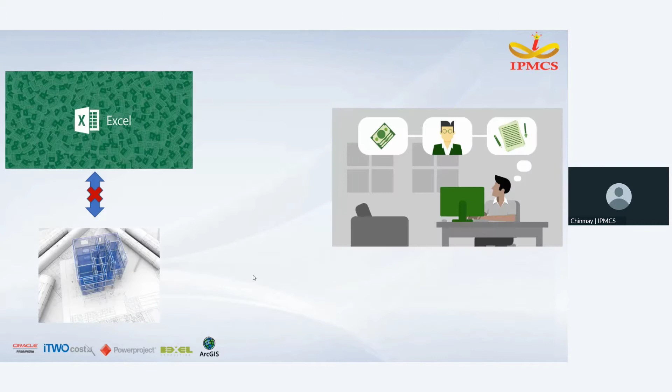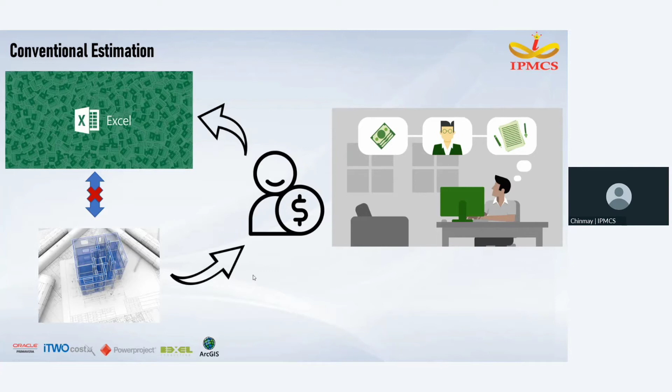But if I say most of these things, you can do at one place, isn't it interesting? But before moving to that, we will see our conventional method, that is using Excel - partially accurate but time consuming and with a lot of challenges. Challenges in Excel? Yes, there are. The challenges are: difficult to manage advanced pricing rules, lack of control and security, human error is more, it is not designed for collaborative work, plus it is hard to consolidate. Is it relatable, right?

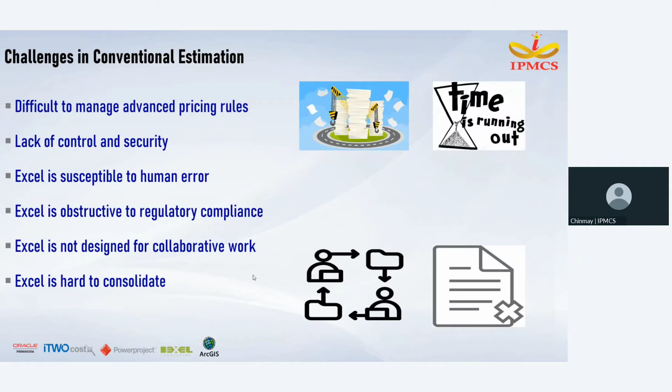What if I say that we need to remove our conventional method and move to digital estimation? Now you will ask, what is digital estimation and how it works? Basically, digital estimation is the estimation of takeoffs through software which produces accurate estimations compared to doing it by hand, with great accuracy, which in today's case is iTWO CostX.

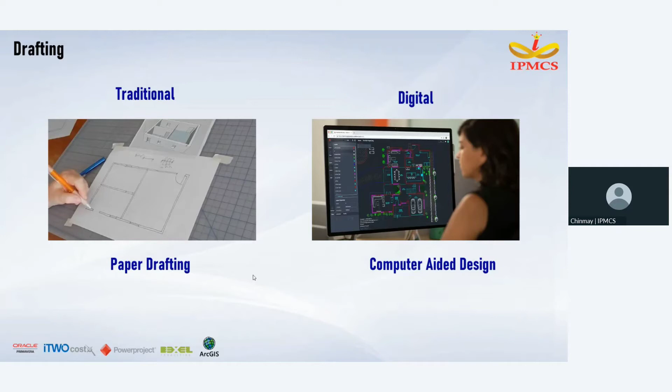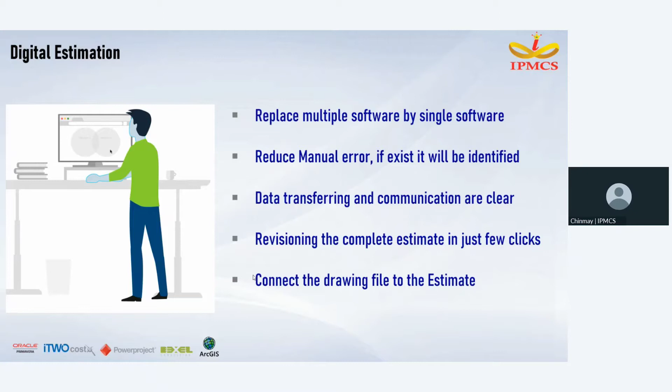In drafting, we can use CAD designs instead of paper drafting. For modeling, we can use BIM software to work efficiently, which has benefits such as replacing multiple softwares with a single software, reducing manual error, easy data transferring and communication, and revisioning of complete estimates, and many more. All this with the advantage of cumulative work, which is time saving and cost saving.

By cumulative work, I mean that everyone can work on this software. Before, when there was a communication barrier or hierarchical barrier, it is removed in digital estimation. All of this is possible because of iTWO CostX.

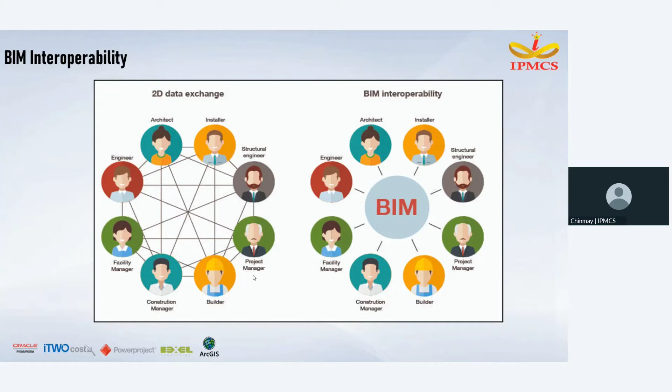Before moving to the software, now we have a poll for you. I will give you a question, and you have to answer it in 15 to 20 seconds in the chat box. Your question is, which of the following items is difficult to quantify in an industrial project? Your options are masonry, steel structures, MEP and HVAC, or any other quantities. You can now answer it.

So if you see, most of you have answered steel structures, right? So that can be easily done in iTWO CostX.

So now, what is RIB iTWO CostX? It is your complete 2D and 3D estimation solution, which has been awarded in 2019, 2020, and 2021 for estimation and valuation software of the year. It is widely used to improve accuracy and efficiency in quantity surveying, construction, subcontract comparison, estimating projects for large and small scale. It is the leading estimation software used all over the globe.

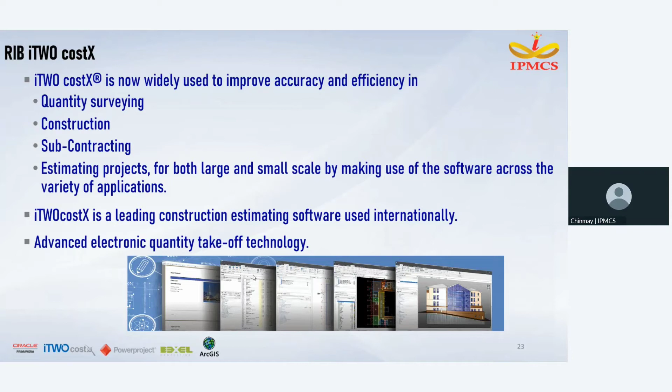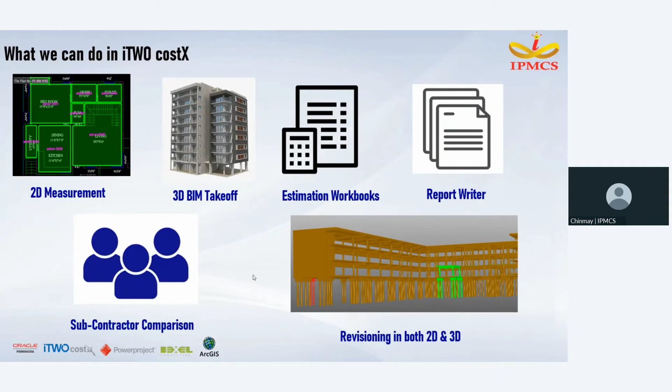With RIB iTWO CostX, we can do 2D measurements, 3D BIM takeoff, estimation workbook, report writer, sub-contractor comparison, revisioning in both 2D and 3D, and many more things.

So if we see key features of iTWO CostX with respect to drawings, they are scale correction, drawing register report, working area setup, save view. In 2D quantification, we can do layer customization, rebar mode, overlap, adding colors, viewing in 3D, and quantification report.

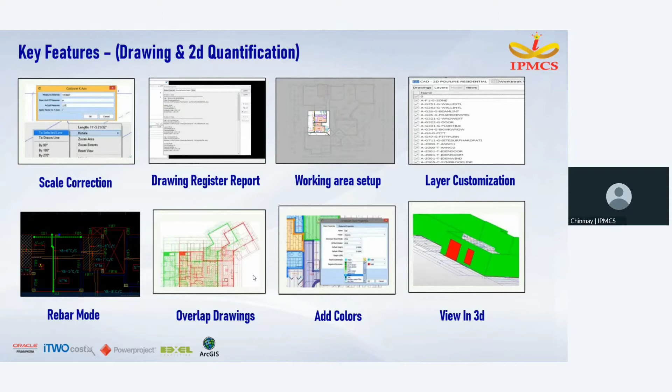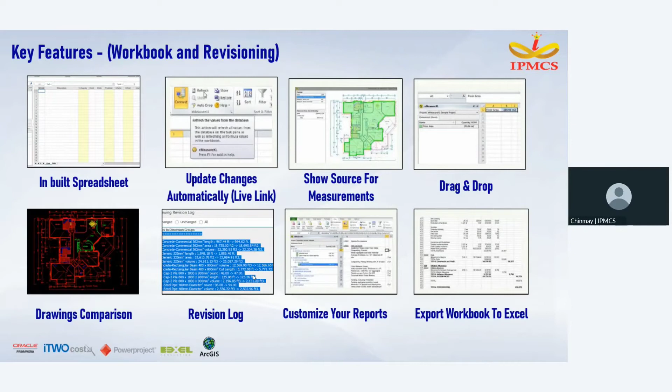For the workbook, we have in built spreadsheet, live link, show source, zone wise filter, reference report, code wise grouping. In revisioning, we have drawings comparison, revision log, and comparison report. We can also create report templates and login credentials which will restrict your project files.

So if we see the compatibility of iTWO CostX, you can import IFC files, PNG files, JPG, DWF, PDF, SketchUp, DXF, DWG, RVT, Revit files, and you can export it in PDF, RTF, Excel, HTML, image, and Primavera as well. Now we will see our next poll.

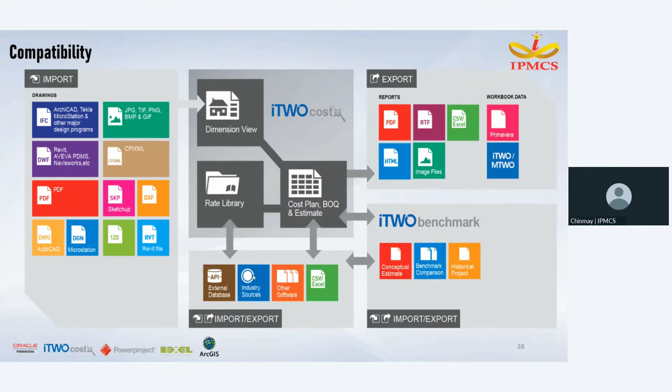Your question for the poll is, what difficulties do you face to recalculate the renovation of a PEB structure? Your options are comparing time consumption, loss of old records, comparing existing building drawings, or comparing changes in existing drawings. You have 15 seconds to answer it.

Thank you so much for answering. So most of you have voted for comparing changes in existing drawings. So all these things we can do in iTWO CostX, and for the same we will see in our next topic.

So moving on to our next topic, estimating of renovated industrial building. What is industrial building renovation? It involves updating and remodeling of a building that houses industrial businesses. These structures are typically industrial plants, factories, or warehouses.

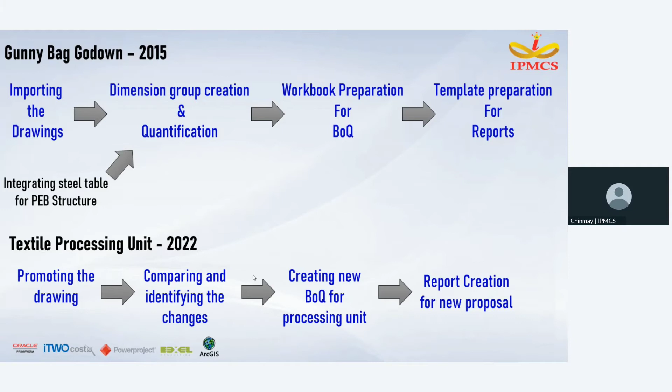All this for a gunny bag godown which was created in 2015. But in 2022, we converted it as a textile processing unit, in which we just promoted the drawing, compared and identified the changes, created new BOQs for the processing unit, and created a report for the new changes. Now, more about this, Mr. Dhanashekar will guide you. Over to you, sir.

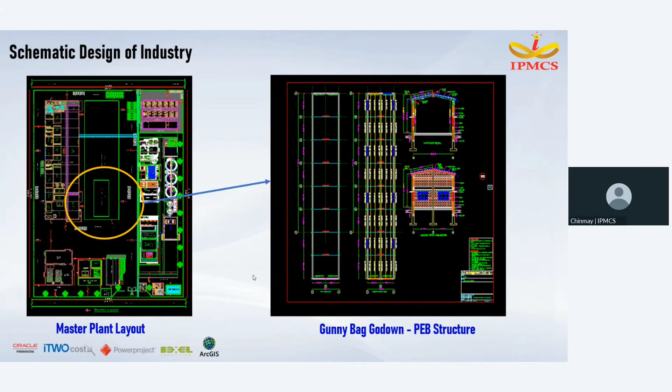Okay, moving on to the software part. I'll just share the software to you. Just tell if the screen is visible or not. Is it? Yes, Mr. Chinmay, it's visible. Okay, you can proceed.

From here, what we'll do is we'll add drawings. Okay, so now...

For the software part, I think Mr. Dhanashekar will tell you more about it. Just I'm transferring to Mr. Dhanashekar.

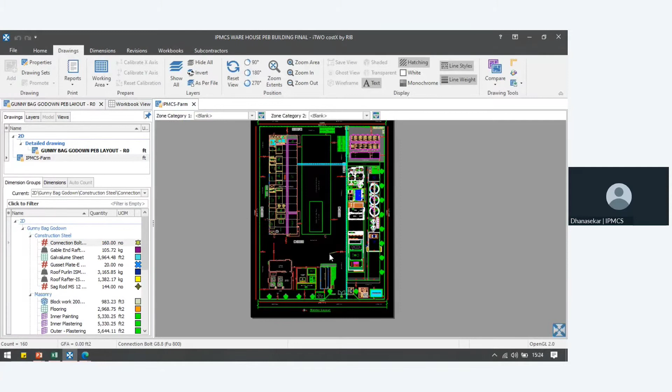Thank you, Mr. Chinmay, sorry for the confusion. Let me move to the CostX part. Here I imported two different drawings. This is the master layout which we can see. On this master layout of the complete industry, I took this particular building, the Gunny Bag Godown, for the detailed quantification. So here I have my drawing.

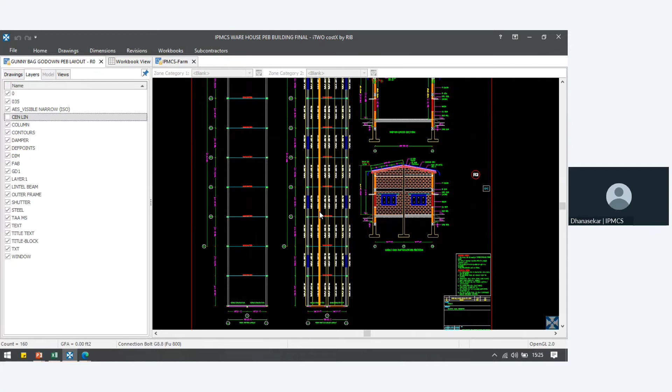Before moving to the quantification and template creation part, let me show some features of drawing reading in iTWO CostX. Here we have a separate option to customize our layers. In this we can see multiple sector items, both structural, masonry items, as well as PEB elements. If I want to filter the model structural wise, masonry wise, or PEB wise, we can use the customization option on the layers. This helps with drawing customization, which helps read the drawing in a proper way.

So now it is showing only the PEB items which we use for the quantification part. All right, so coming to the presentation part.

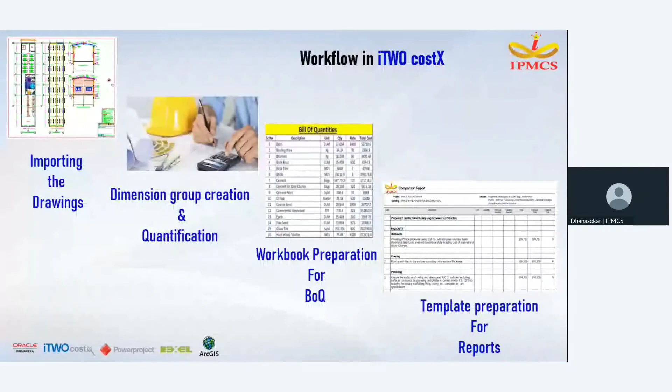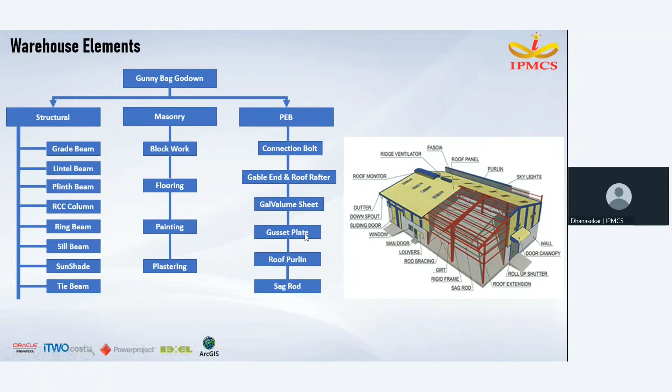From this PEB structure detailed drawing, I did the quantification for structural element, masonry, as well as PEB. Under structural, I completed the grade beam, lintel beam, plinth, RCC columns, ring beams, sill level beam, sunshade and tie beams. On the masonry part, I covered block work, flooring, painting, and plastering. Moving to the PEB, I covered connection bolts, gable end and roof rafters, galvalume sheet on the rooftop, gusset plates for individual columns, roof purlins, and the sag rods.

Okay, let me see the quantification part in iTWO CostX. For PEB quantification, it is essential to use the unit weight of the steel sections like ISMB, ISMC. For that, I use a separate feature called constants. In my screen, I have my constant values, the unit weight values in a format which will be supported by CostX. I can import this into CostX and apply it for the quantification.

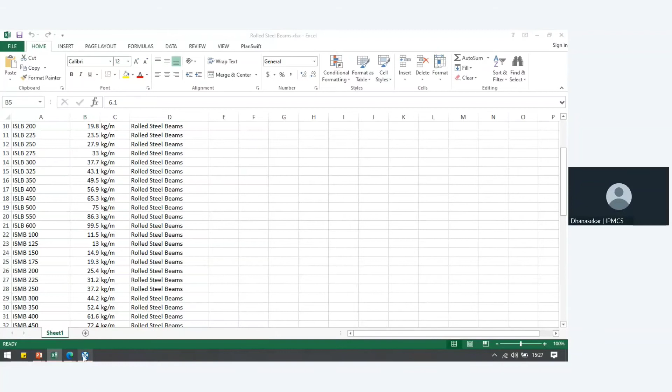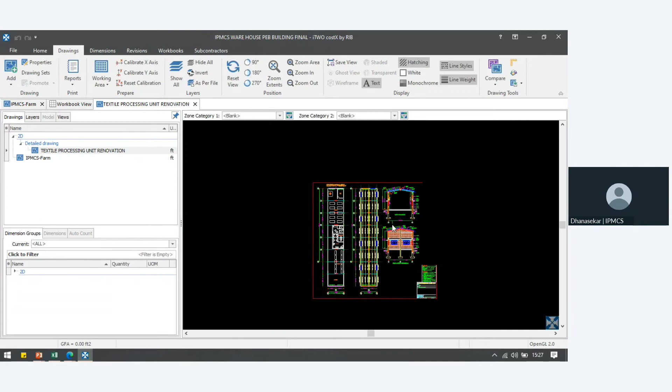This is my detailed drawing, and here I have the templates. In this, I added a template for my roof rafter ISMB 200 quantification. In this, I'm going to integrate my constants. Before moving to that, I'm going to import the Excel data inside CostX.

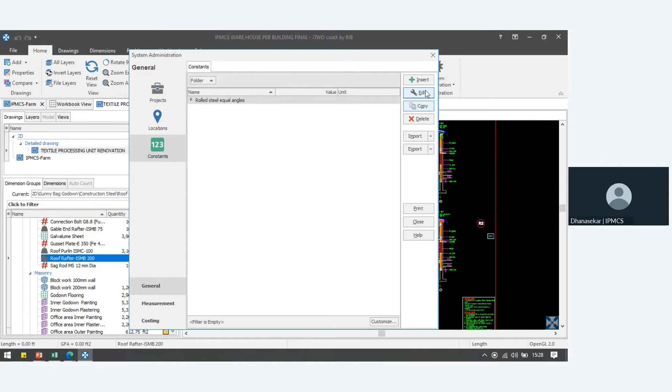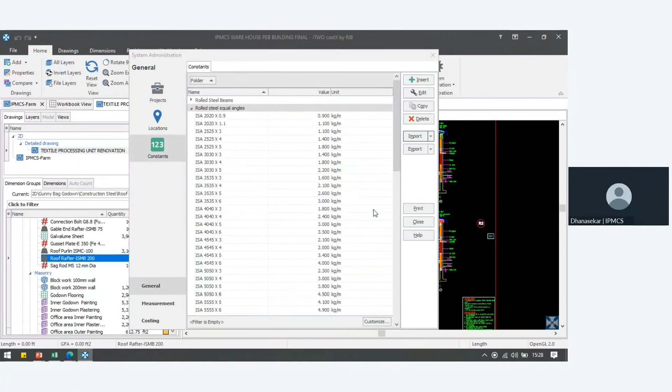So I have the rolled steel beams unit weight as a separate Excel. That's it. So we imported the unit weight of the complete package.

Now I'm going to utilize the particular unit weight for ISMB 200. This is a template which helps me for the quantification. Inside this, I am adding my unit weight, so we no need to refer the IS codebook or any other document all the time. Instead, we can add these values here as a constant. So for ISMB 200, I have the value of 25.4 kg per meter.

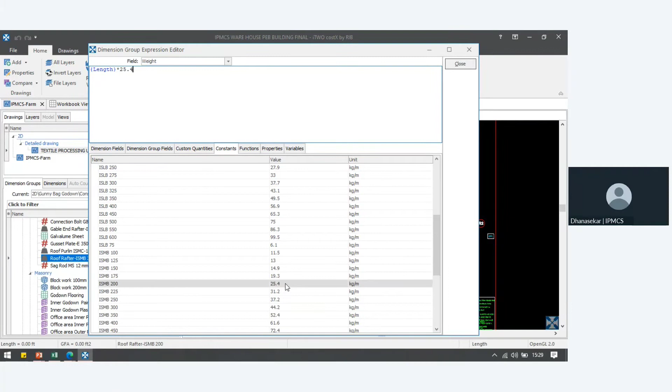My template is ready, so now coming to the quantification part. Hope you can see this is my main rafter. I don't want the parallel purlin and other elements, so in this case I can use this layer modification.

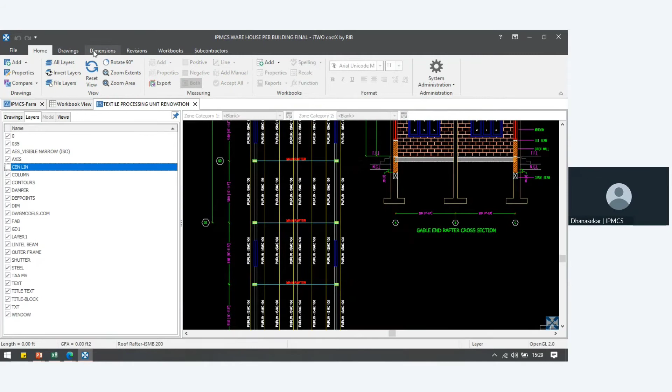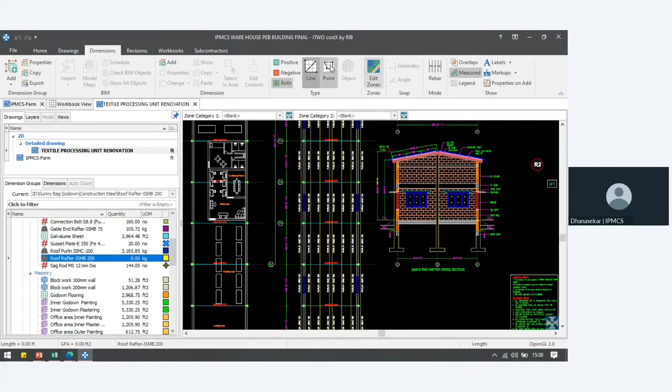These are all my rafters. I just need to trace the lines to measure the length of the rafters. Automatically, it will calculate the unit weight and give me the weight of the rafter in kgs.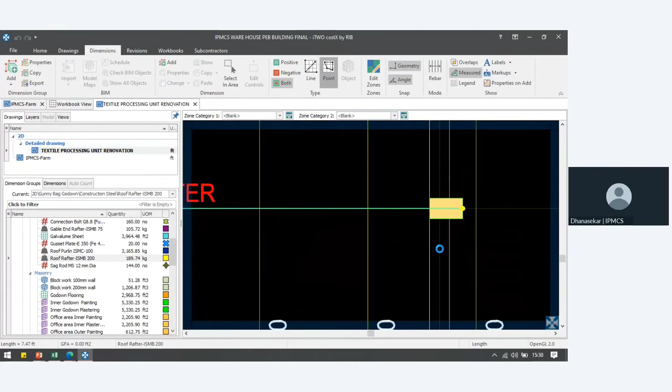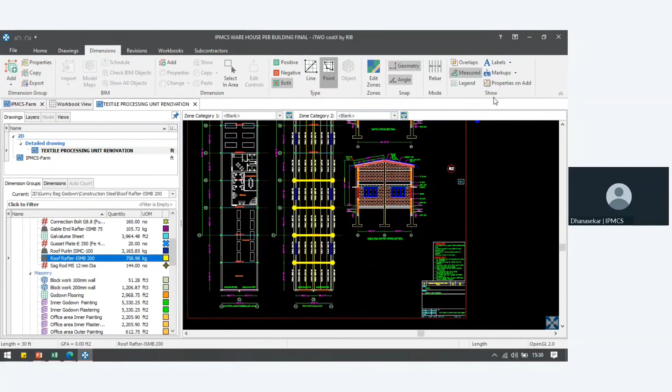So like this, we can arrive at the quantity. In case you want to display the values, the weight of each item, you can use this label option. This is one of the features, and it will help you view the weight of the particular purlin. This is on the quantification part.

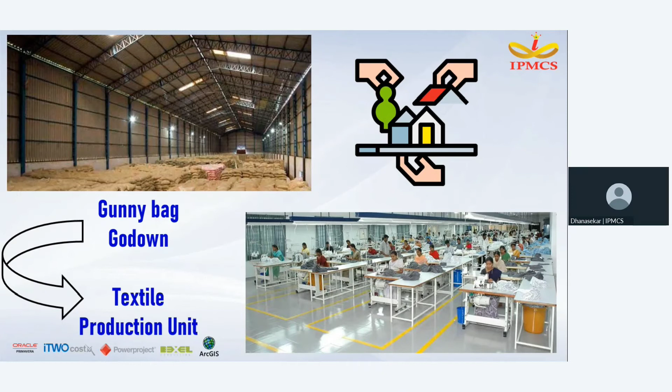Coming to presentation, previously what Mr. Chinmay discussed - the Gunny bag Godown, which was previously constructed in 2015, is later renovated as a textile processing unit. So I collected the revised drawing. This is my new drawing for the textile processing unit.

This is a comparison on the existing drawing. From this window, we can able to see the change of measurements, change of lengths. Let us show this particular interface on the CostX part.

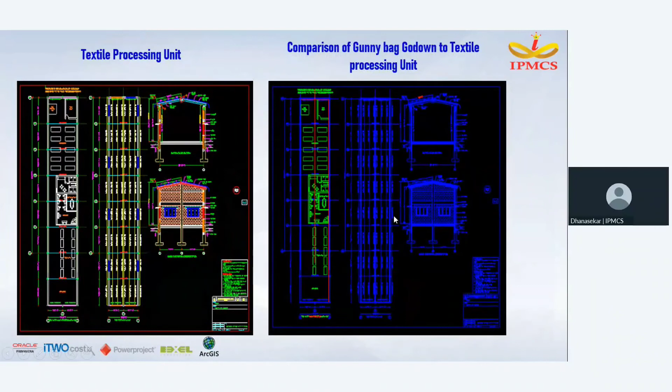So I already added the renovation as a revision. Let me do the comparison between the previous drawing for the gunny bag godown with this new processing unit.

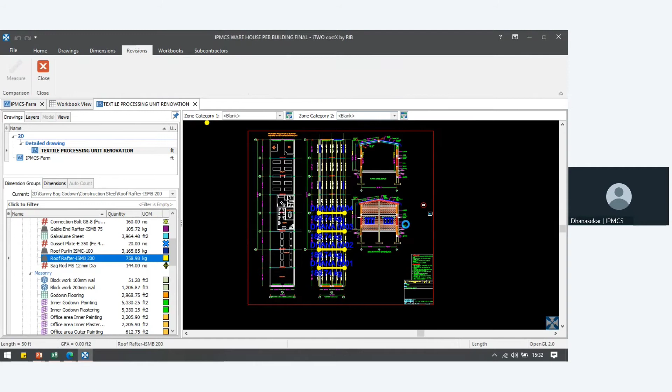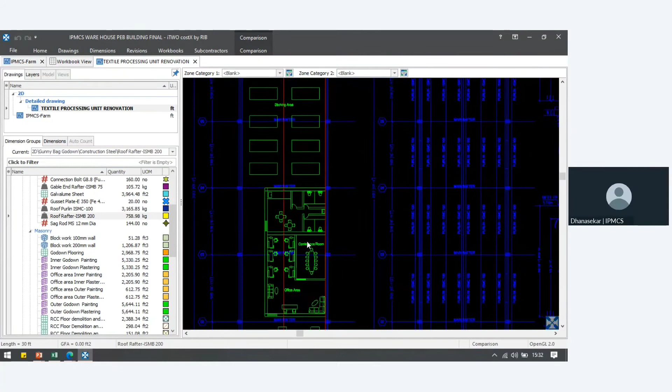Now it will give you a clear idea. The existing structure outside is the same, but inside the building it is split as storeroom area, pantry area, conference room, office room area. This color difference will help you understand the drawing changes - the blue color remains the same, so there is no change in the existing blue color lines.

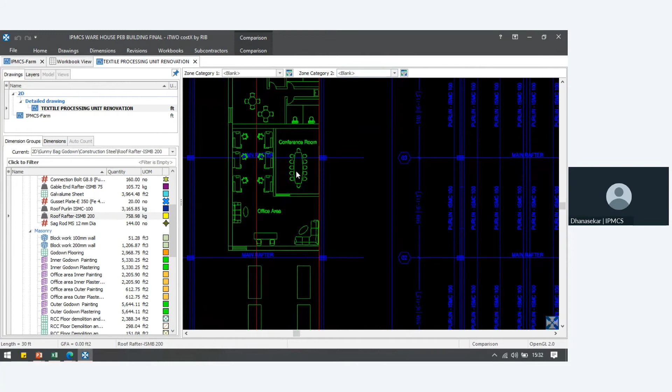The newly added items - whatever lines of block work, furniture items, even MEP - everything newly added will be represented in green color. From this we can identify the changes which happened from the previous to the new renovation or revision. We can also print this as a PDF - once you want to make it a PDF, we can create a drawing comparison report from this window.

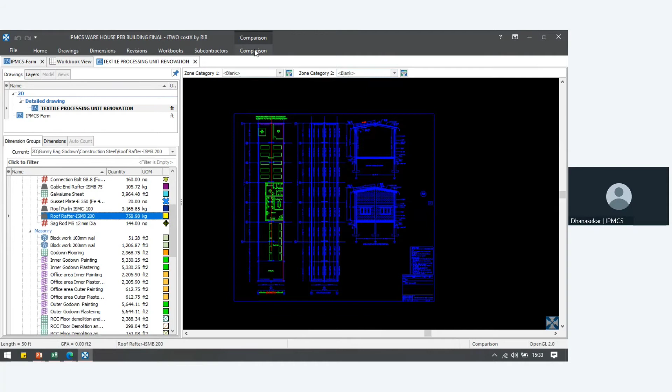Let us move to the workbook part. I already have my proposed construction of gunny bag godown PEB structure, the complete abstract. In this you can able to view the quantities of each line item - the block masonry, the flooring, plastering and all.

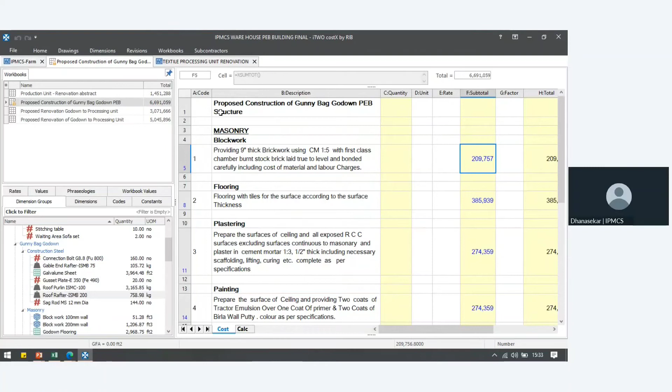Before moving further, I will explain the structure of this workbook. This is inbuilt for BOQ preparation. Now we are at the level of cost sheet number 1, and in further levels we can able to generate macro level abstracts also.

We have the quantity sheet in our hand, to carry our quantity breakdowns. This will help you drag and drop the quantities which we got from the dimensions. Next, we have the rate sheet to carry your rate analysis, which is in another workbook.

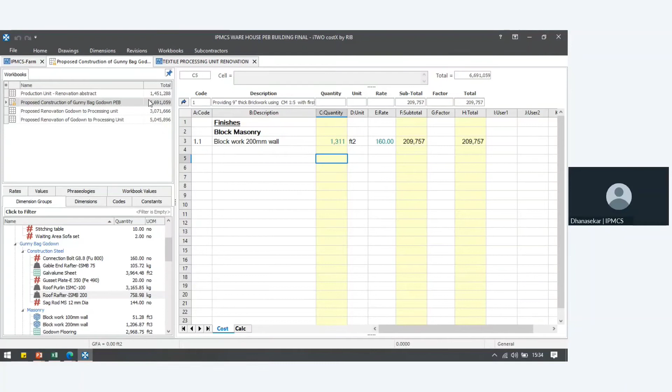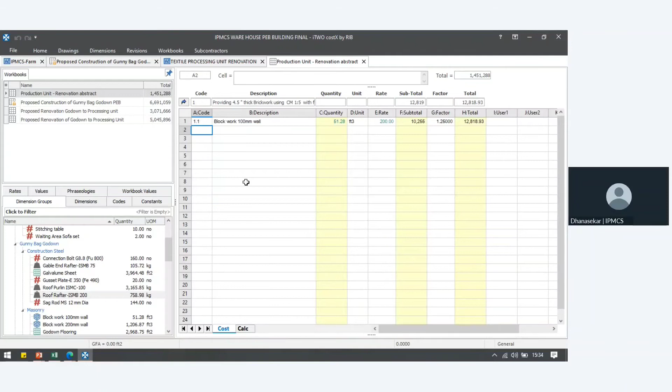So this is my quantity sheet, especially to carry your quantity breakdowns. Also, I have the rate sheet to carry my rate analysis. In this project, I directly link my rate library to the workbook.

So quantities we can derive from the drawings - but what about the rates? We can save the rate libraries under the system administration, and this will remain for all the projects. So if you are working further in the CostX software for new buildings or new projects, we can able to utilize it for upcoming projects also.

This directly links with the values from the drawings, or directly linked with your drawings. We can able to review using one more option called source. This will take me to the respective drawing, and the respective element will be highlighted in the color we assigned to the dimension group.

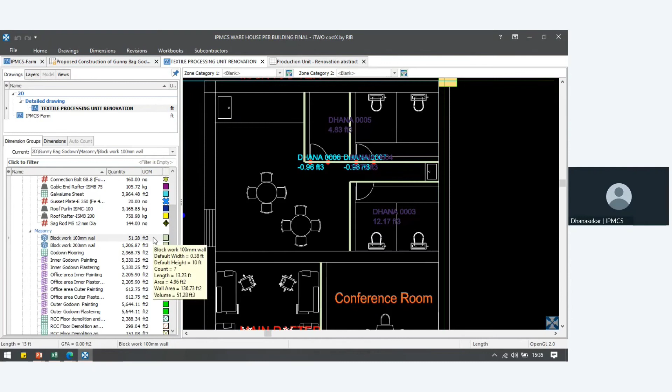One more feature is there to cross check your quantification, which is called 3D. Now we are using a 2D drawing, an AutoCAD format drawing, but from there itself you can able to view the complete structure as a 3D. Let me show that.

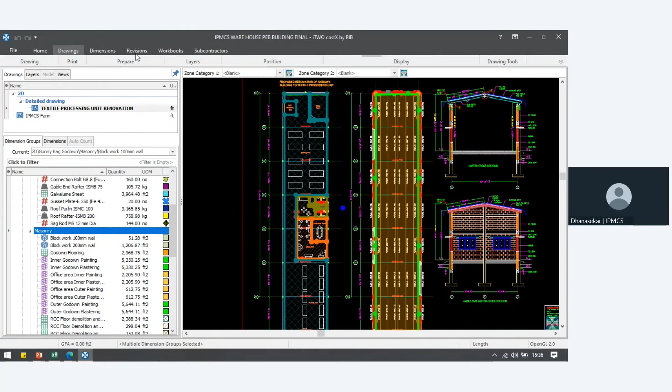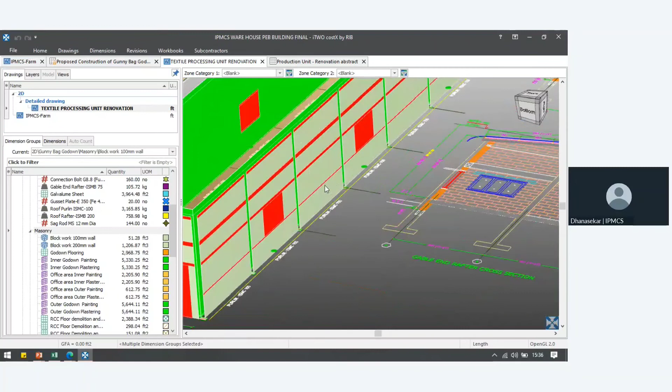So whatever you are seeing in the red color are the deductions - deductions of the tie beam, the lintel beam and sill beam, and the openings. This is how you can able to prepare the 3D view. It depends on the parameters we are inserting in the dimension group, which we call templates.

In this newly renovated floor plan, the office room and conference room are added. For these new specific elements, the masonry quantities, plastering quantity, and painting quantity will all be added, so we can encode using the templates.

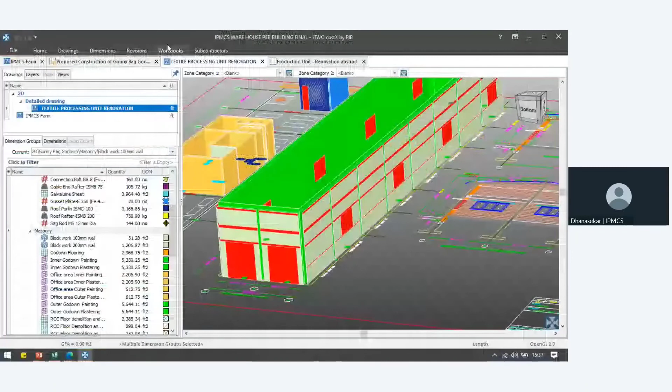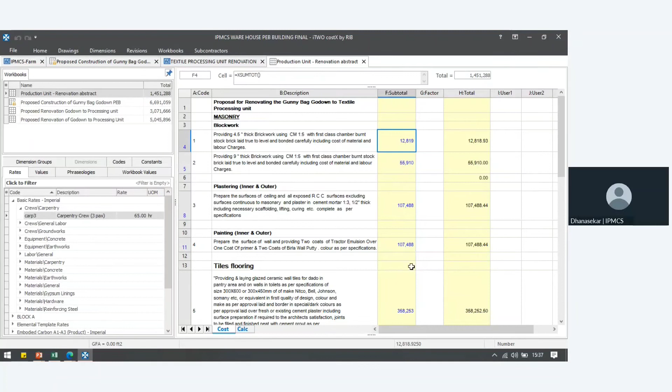In this workbook, you can see the proposal of renovating the gunny bag godown to a textile processing unit. The existing outer structure remains the same, but only the new elements added inside the building will affect the BOQ. So we added the block work quantity, plastering quantity, painting quantity, and tiles quantity. These are newly added items, which we can review using the workbook source option.

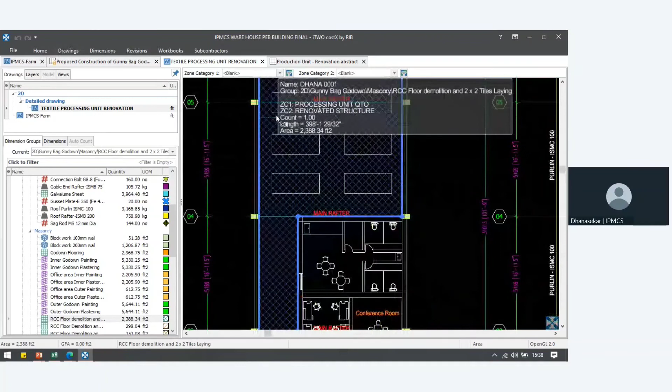This is the flooring quantity, except for the office room and the conference room. This is RCC floor demolition and 2x2 tiles laying area, and this is RCC floor demolition and granite flooring area.

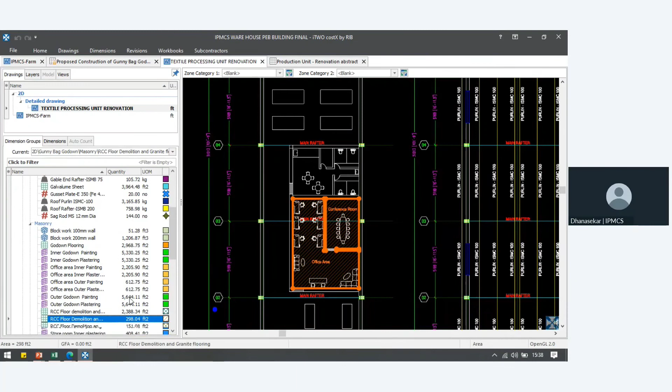Like this, we can import the drawing and create the template for our respective quantity takeoff. We can move the respective quantities to the workbook to carry out our BOQ preparation.

If any renovation or revision happens, we can add the revision and identify the changes using the compare drawing option. We can also prepare the revision log, and then audit the revisions that have happened.

Once you're done with the BOQ part, to promote the revision quantities, we can generate reports as a comparison, or create independent reports for required proposals.

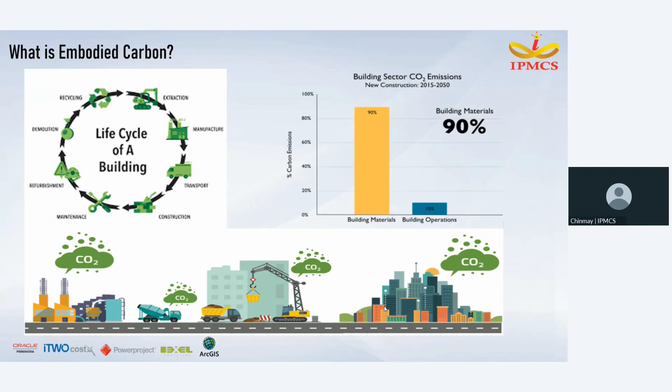Using iTWO CostX to take out the carbon emissions and make the structure sustainable, we can do the calculations in CostX. In this, if you can't see clearly, I'll give you a rough idea and then we'll move to the software. Here you see a BOQ of a building. A1 to A3 is the production stage, which includes transportation, and A4 to A5 is the execution stage or post-construction stage.

Now if we move to the software, you can see this clearly. As I told you, A1 to A3 is the production stage including transportation, so these numbers you see here are the carbon emissions for the production stage. The numbers from A4 to A5 are for the execution and post-construction stage, so you can see the carbon emission here.

As I told you, we need to calculate carbon emissions for each and every material we put in this. In iTWO CostX, you can compare that as well. In the rate library, there is embodied carbon A1 to A3, which is the production stage.

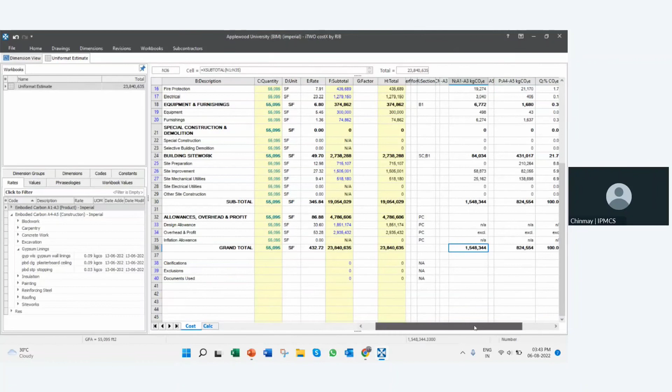If we open that, each dimension or rate here is related to the carbon emission. For carpentry, n number of carpentry items are here, and with respect to that, the carbon emissions are mentioned. Like that, you can add many more of these in iTWO costX, not just for this one but this as well. At the end, this is the total carbon emission produced in the production stage, and this is in the execution stage.

Sustainability and building transparency is the next important step in the evolution of our profession.

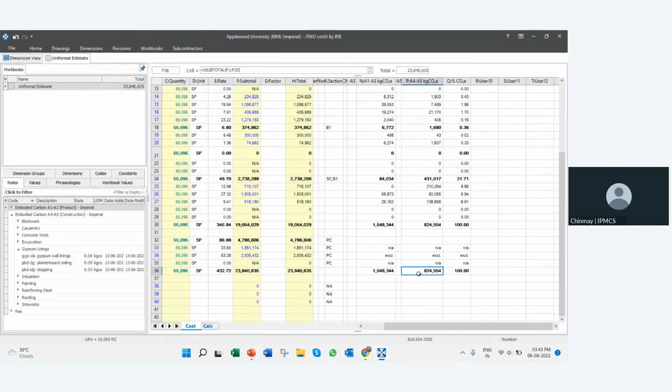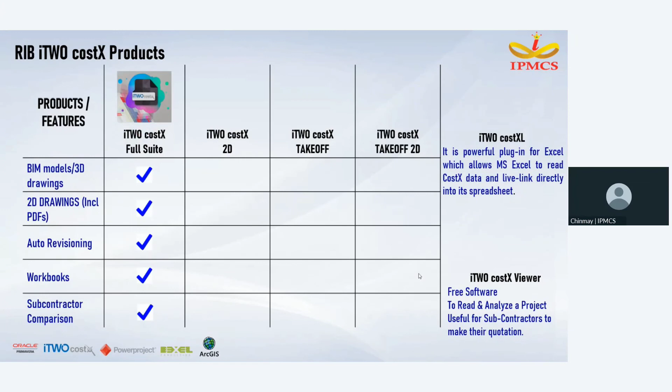So moving on, I'll explain iTWO costX products. Two of our recommended products are iTWO costX Full Suite, where you can use all the features of the software, and iTWO costX 2D, where 2D drawings, workbooks, and subcontract comparison can be used. iTWO costX Takeoff can be used for 3D drawings and 2D drawings with auto revisioning.

iTWO costX Takeoff 2D can be used for your 2D drawings. iTWO costXL is used for Excel spreadsheets, in which you can integrate values and live link them. iTWO costX Viewer allows you to view the whole project.